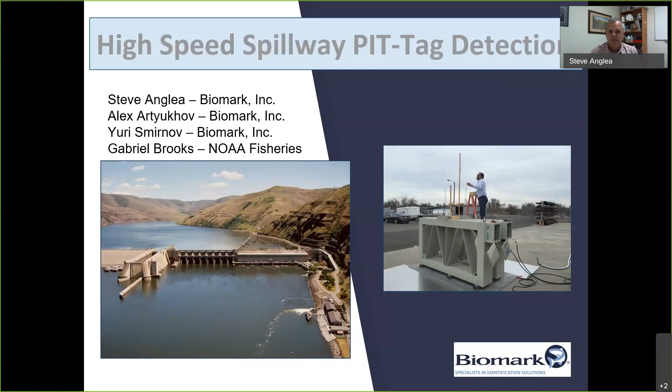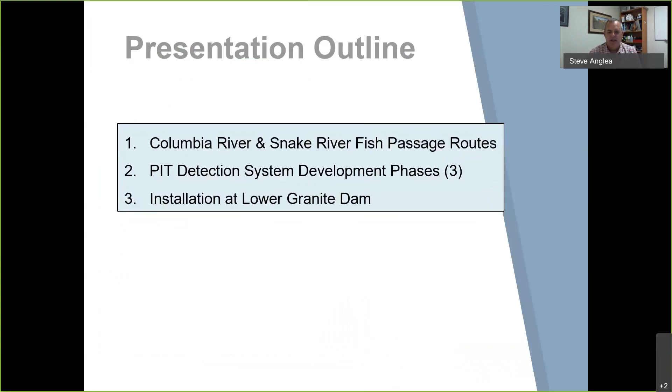I'm going to go over the basic structure of the presentation: a description of the passage routes present at the dams in the Pacific Northwest, the phases of development of this project, and ultimately the installation at Lower Granite Dam.

The study area for the project is in the Pacific Northwest of the United States, predominantly in the Columbia River Basin. The areas of interest are the Lower Snake River, which consists of 4 hydroelectric projects, and the Lower Columbia River. The dams of particular interest are Lower Granite Dam, the first hydroelectric facility encountered by juvenile salmonids migrating downstream, and Bonneville Dam, the last project encountered by juvenile salmonids.

All of these locations have adult and juvenile passage structures, and all of those structures have pit tag detection in them. Detections at the locations are transmitted automatically to a regional database called the Pit Tag Information System, or PTAGIS. It's a very extensively wired array within the main stem, as well as many tributaries in the basin.

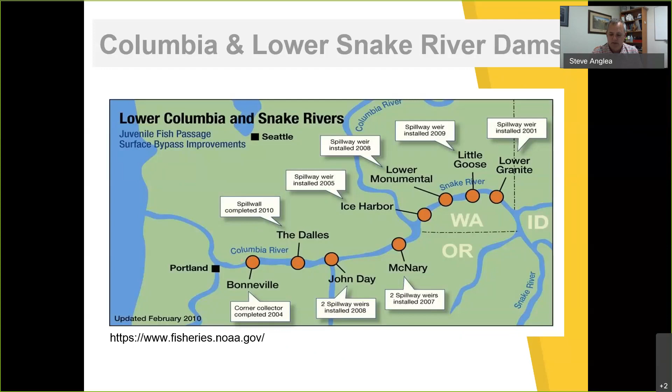To give you a sense of the scale of the dams we're talking about, this is a picture of Lower Granite Dam with a spillway in the middle of the river, and a powerhouse on the right-hand side at this particular location.

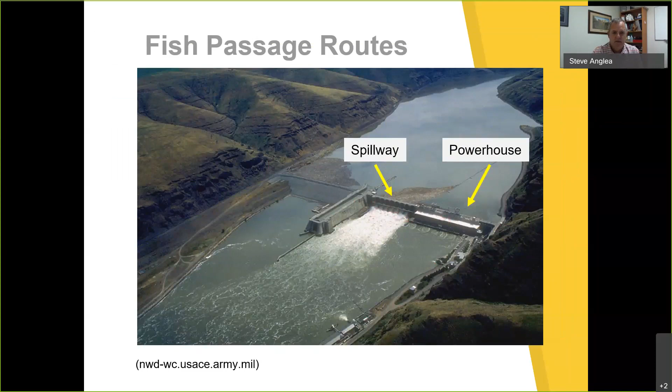The juvenile bypass systems within the powerhouse typically consist of a guidance system that guides juvenile fish, using intake screens, into a bypass system that then routes them to a collection facility downstream of the dam. The other option for passing through the powerhouse is to go through turbines, or obviously spill, where the animals just pass through spill. There are pit tag detectors in the juvenile bypass system, but there are currently no detection systems within the turbine passage route or the spillway.

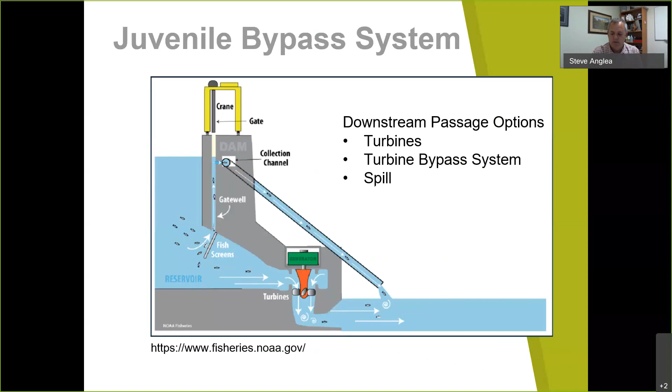One of the impetuses for this project is that as the operation and management of the hydro system has changed to emphasize spill, there are fewer fish passing through the juvenile bypass system and therefore fewer pit tagged fish. NOAA Fisheries, who is responsible for determining the smolt to adult return rates of those fish, is running out of data, or not getting enough pit tag detections to provide reliable estimates for the SAR rates. That led the region to push for the development of a pit tag detection system for the spillway.

The system consists of not only an antenna, but the transceiver and the tag, the three factors that go into a detection system.

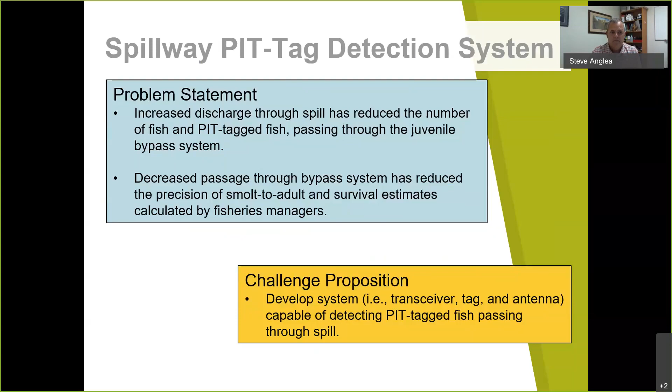The criteria for that system was tag speed, like any system we design. The estimated tag speed for this area would be 60 feet per second, or 18 meters per second, or 41 miles per hour. To get an idea of what that means, imagine that distance of 60 feet or 18 meters, and then transiting that distance in 1 second. So it's extremely fast, much faster than any typical RFID system.

The detection system needed a range of 60 inches, and it also needed to be wide enough to provide 2 or 3 telegrams of the pit tag as it passed through. So those were the criteria.

Just some references: a standard tag traveling 60 feet per second needs 2 feet of activation in order to get a single telegram. This also led to the desire to develop what's called a half telegram, which requires half the amount of time to transmit its signal compared to a standard telegram. A standard telegram requires 32 milliseconds to transmit its tag signal, and a half telegram requires 16 milliseconds.

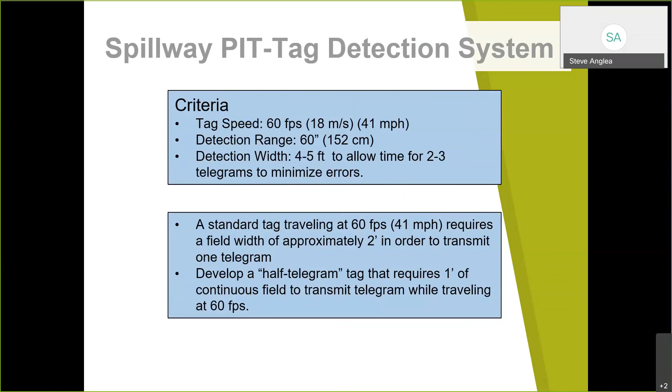Hey, Steve. You mentioned the half telegram tag, and somebody just submitted a question regarding that. Is that something being used on this project?

The half telegram tag is currently not being used. It's a proprietary tag manufactured by Biomark that requires proprietary firmware for the readers. The Corps wanted to, and I can get into the results later on, note that the half telegram tag functions very well, but the Corps wanted to make sure the system performed well for the vast majority of tags already at large in the system. So this system and all the data I'm going to show you is really based on the standard Biomark tag.

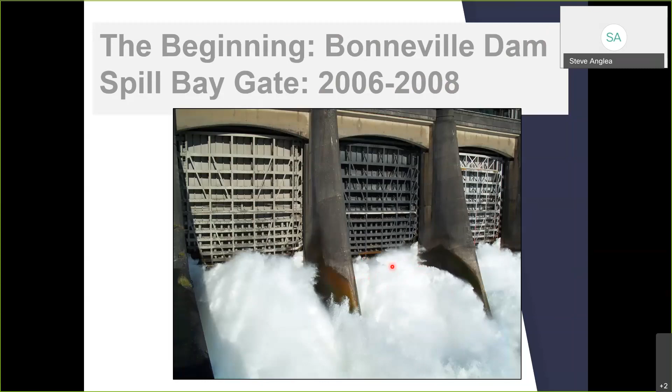Bonneville Dam was built in the 1930s, and the gate repair pit is used to repair gates. They were also concerned with dust from lead paint that had been used over the years, so there was a fair amount of cleaning needed to make that environment suitable to work in.

So here's the gate repair pit. That's the test subject, and this is the leading edge, or the bottom of the gate repair pit. The challenging aspects were the curvature of that gate. It's not just a flat wall or a sill that you could easily mount an antenna to.

So it's kind of two different radiuses that they had to deal with. And it's also metal. The metal absorbs the energy of the antenna's electromagnetic field and reduces its effectiveness. So they had to come up with a means to isolate the antenna when it's placed on metal, but still place it in close proximity to the metal.

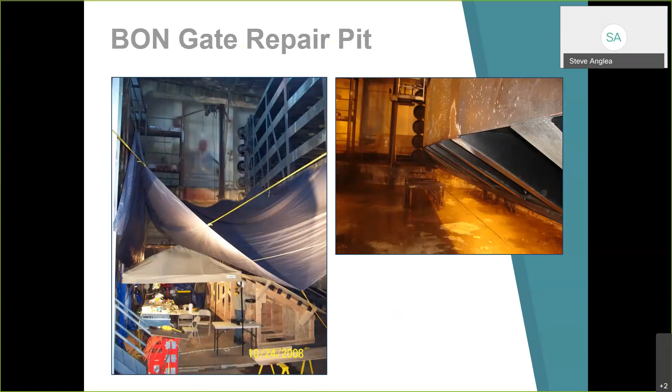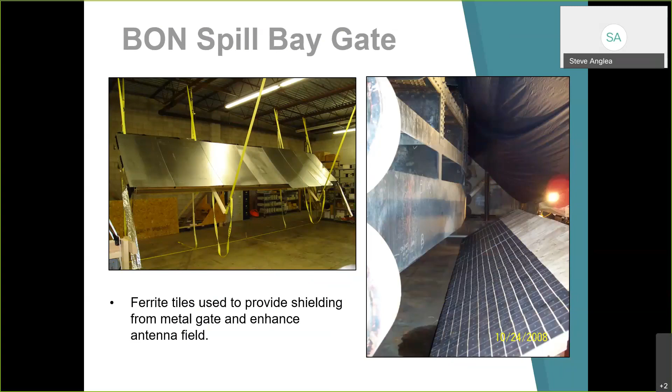And they also used Litz wire as opposed to a traditional copper wire to form the coil. If you haven't seen Litz wire, it almost looks like a multi-strand fiber optic cable. A wire that's rated as 10 gauge has almost 1,000 strands, and each of those strands is insulated. That insulation helps reduce what's called the skin effect and reduces the interaction among the neighboring conductors, providing a low resistance cable that can push a lot of current relative to a standard wire.

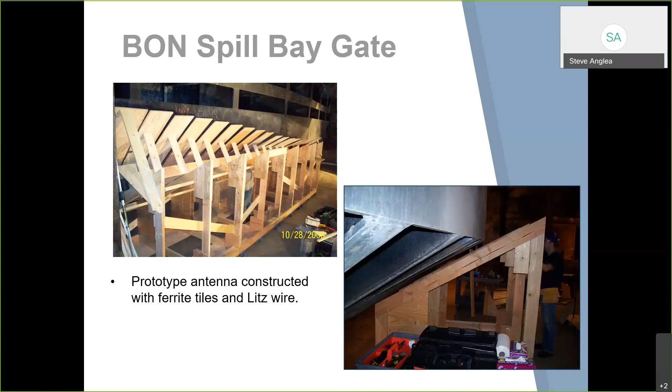So the effort was successful. However, they did run into some practical and logistical issues. The first one is that if you put an antenna on the bottom of the gate, you just have a single detection point. You don't have the ability to empirically determine detection efficiency.

The other challenge is just mounting something to the bottom of the gate with the vibration that occurred—they had some sensors ripped off the gate. And then with the two large 25-foot antennas and expecting thousands of fish passing through, there was a concern that tag collision would be a big issue. If you have two tags in close proximity to each other, they would cancel out, and you won't detect either one. So those were kind of the downsides or issues, but they did learn quite a bit from the effort.

They demonstrated the use of ferrite tiles to get close to the metal gate, so that was effective. Yuri updated the exciter circuit, the tag detection circuitry, to be able to detect a very small tag signal out of the background noise. The transceiver was upgraded to operate on 50 volts DC and push 30 amps of current to the antenna, significantly higher than anything that had been done before. And also, as the last bullet says, they began the conversation of this half telegram, half fast tag.

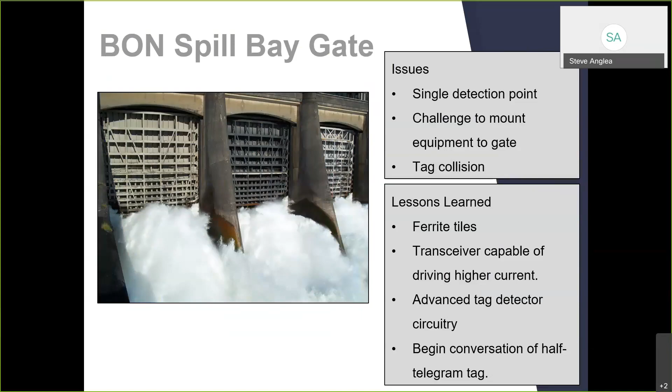So the effort completed at Bonneville Dam. The project wasn't over, but they realized we needed to go to a different location, and that effort shifted to Lower Granite Dam. This is the first dam on the Snake River encountered by juvenile salmonids migrating down the Snake River, and the goal was to take advantage of a reshaping of the Ogee for Spillway 1 that was planned.

Also, the flow is a lot smoother. This is Lower Granite Dam. These are traditional undershot bays, and the very first bay is where the antennas would be placed—you can see the flow is quite a bit smoother in that bay due to the location of a removable spillway weir in Bay 1. The water velocity in this location could still reach up to 80 feet per second, or 24 meters per second, and anticipated water depth was around 4 feet, or 1.2 meters deep.

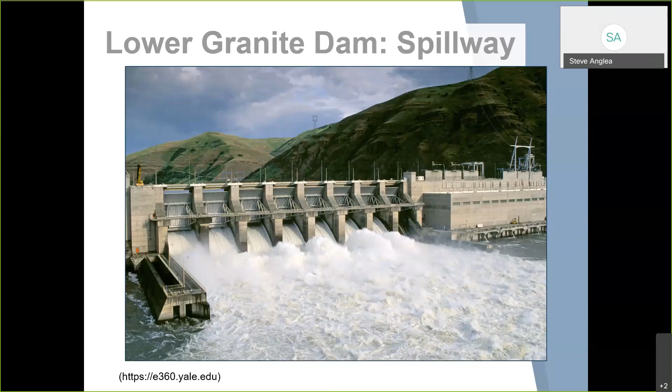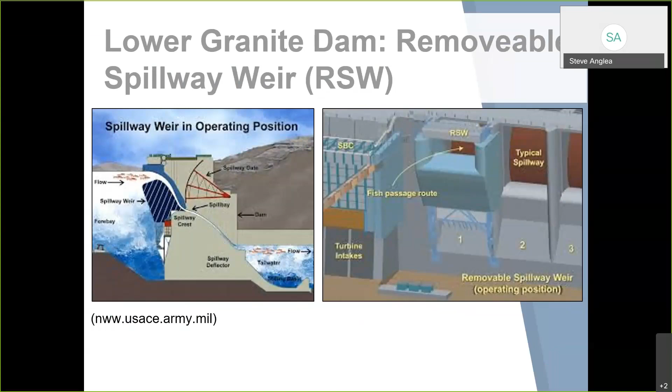From my previous life when I worked for the National Lab, monitoring this thing when it was developed, it creates what's called a flow net, or river, in the upper 20 feet or so of the forebay. Fish sense this flow net and use the RSW passage at a higher rate than the amount of flow going through that location. That was one of the advancements, and these RSWs have since been deployed at other facilities in the Lower Snake River. Just to give you an idea of what this looks like.

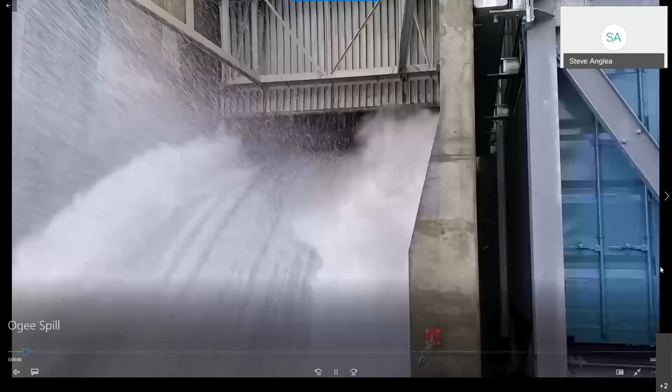This is the flow underneath the gate, at Spillway 1 at Lower Granite. The idea was to place antennas on the Ogee to detect fish passing through that jet of water.

Here's a section view of the Ogee. The idea was to place antennas on the Ogee, taking advantage of relatively low flow. The antennas would be in trenches cut across the width of the Ogee. The Ogee spill bay is 50 feet wide, and the trenches cut would also be 50 feet wide, not surprisingly. But they'd also need to be 7 feet deep and 6 feet wide in order to cut the ferrous rebar back far enough so it didn't impact antenna performance, once the antennas are placed in there. So a pretty big excavation, or mining, of the Ogee surface.

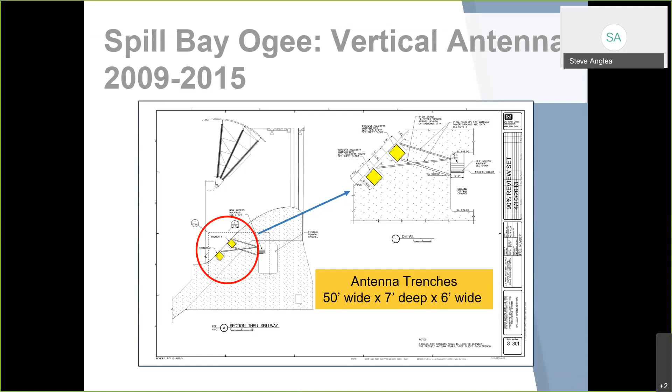The initial antenna design that Yuri came up with was a V-shaped antenna, consisting of 2 independent coils. Here's a coil, and here's a coil, again constructed using Litz wire. The idea was that the electromagnetic field generated by each coil would push up together, like 2 balloons or 2 beach balls pushing against each other, and that interaction would enhance the height of the antenna field. The results were very successful.

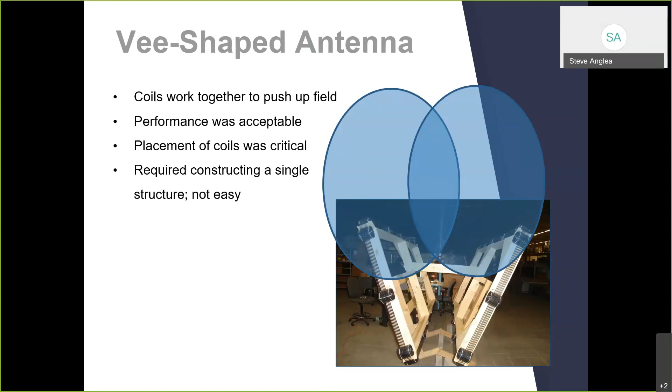However, from a practical standpoint it became unrealistic, because the angle the individual coils were mounted at had to be very precise, making it tough to manufacture, ship, and install while maintaining that angle. One way around it was to create an antenna that encased both coils in the entire volume, but that meant a huge monolith that would be tough to construct and install, with a huge air void inside that could expand and contract. So even though detection was effective, it wasn't really a buildable antenna.

That led to the use of what we call upright coils. With vertical antennas, we could use two or three sub-antennas. Each sub antenna structure is 4 feet tall, about 8.5 feet long, and 15 inches wide. The spacing between sub antennas could be adjusted to change the height of the field and the detection range, or we could also go down to two sub antennas, where one antenna is actually driving and the other is kind of pushing the field into the other coils.

The other requirement was the read range. Regardless of the antenna shape, we still needed to maintain a 50-inch read range above the antenna in a pass-by orientation.

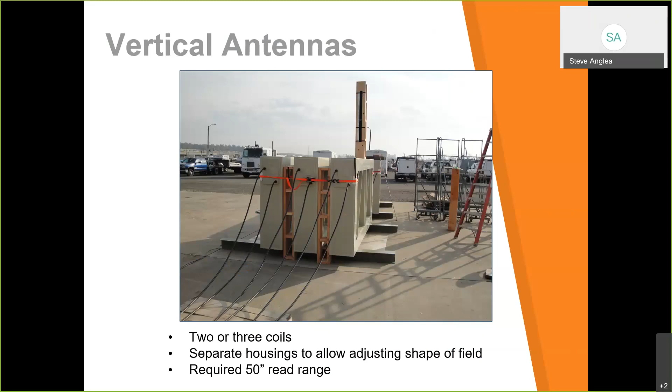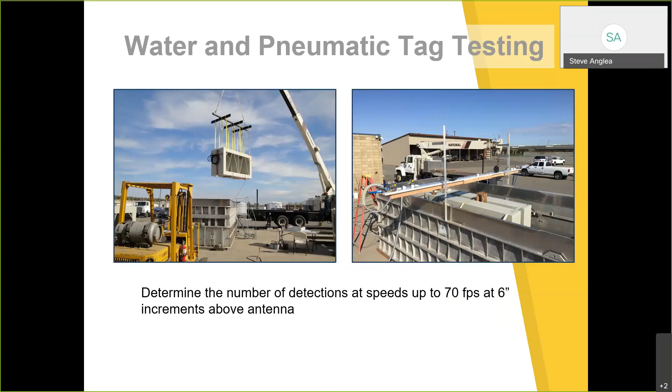Here are some pictures of testing conducted at the NOAA Fisheries facility in Pasco. Here we have two sub-antennas being lowered into an aluminum tank. To verify performance at speed, the Pacific States Marine Fisheries Commission built a pneumatic tag shuttle that let us put a tag in a wooden dowel and shoot it across the antenna at a variety of speeds and heights, starting at the top of the antenna and moving up until it was no longer detected, figuring out where the limit was to get an adequate number of detections.

From the testing in Pasco, we mapped the field using a static tag. Here's Uri — we have a test tag on a stick, and we create this shell, shown in a graph Gabriel put together. We could use a static tag to determine the outer limits of detectability, and we would also shoot a shuttle or tube to determine how it performed at speed.

With this antenna configuration, we were able to read a tag above 54 inches in a static position, shown by this orange area. But that area wasn't sufficiently large or long enough to detect the tag at speed.

You had to be able to detect a tag traveling at speed, 60 feet per second, so you need a length of travel that's more along the 30 inches above the antenna, more down in here. I guess you have to assume there's a detection volume—the area under the shell is the detection volume. So if there's a tag anywhere under the shell, it would be detected, but it needed to be in there long enough to get the 2 or 3 telegrams, and that field was only wide enough 30 inches above the antenna.

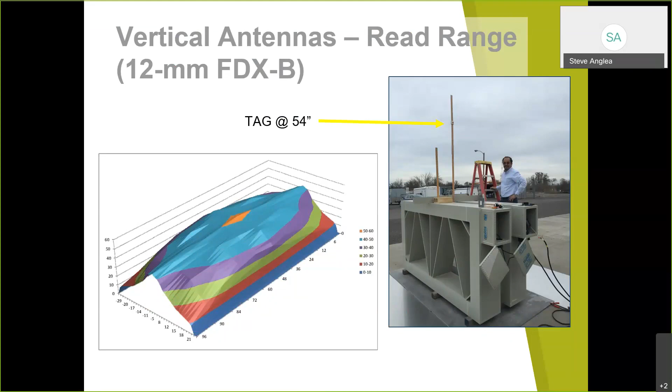Again, some more lessons learned. The standard tag, we could detect at 24 inches above the antenna when it traveled at 60 feet per second. The half telegram tag was effective at a greater distance, but there was also an upper limit to what we achieved with the half telegram tag. It wasn't detected at the 47-inch mark. So the results were good.

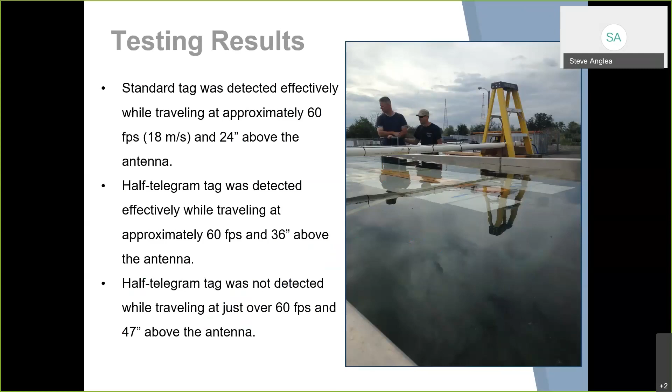Once again, it came down to the structural aspect, similar to the testing at Bonneville Dam and the Vee-Shaped Antenna. You can design a prototype and build a prototype that's effective, but you ultimately need to figure out a way to put it at the dam. When it got to crunch time in discussions with the Corps, it was determined that this 50-foot wide, 7-foot deep trench just was not going to fly. From a structural aspect, the Corps was not interested in cutting a big old notch in their Ogee, which led to the shift to what we call a flat plate antenna that would be no more than 12 inches thick.

So instead of having antennas that go deep into the Ogee, you would have a series of flat antennas, 1 foot tall, placed in 3 different trenches along the Ogee, and as PIT tag fish passed down, they would detect the fish. The speeds expected in this scenario were again in that 50 to 60 feet per second range, and it seemed to go up every time we had a discussion with the Corps.

The balance between the speed and the depth of water is that the water is deeper near the top of the Ogee, and the water is slower, and then as you go down the Ogee, the water depth is lower, but the speed increases. Trying to find the sweet spot in that.

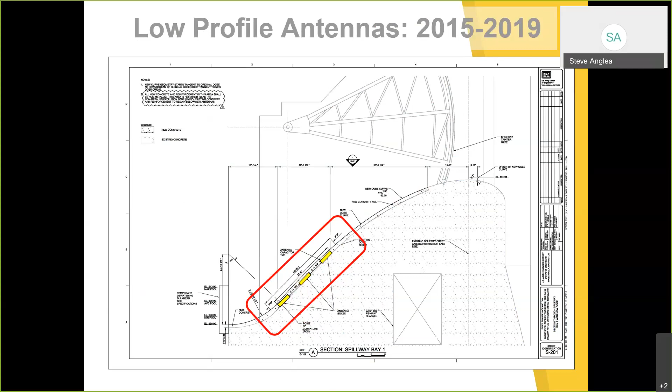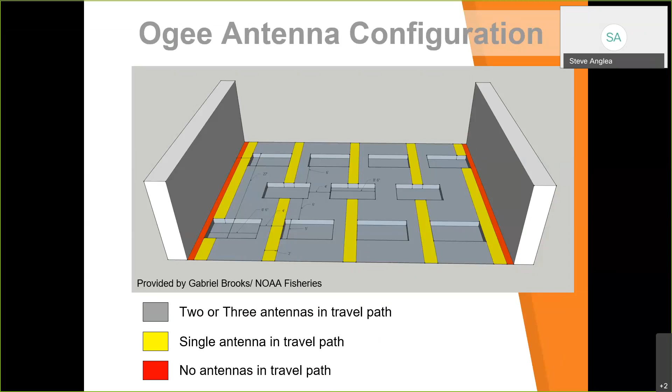And through significant testing, months of testing, this is the end result.

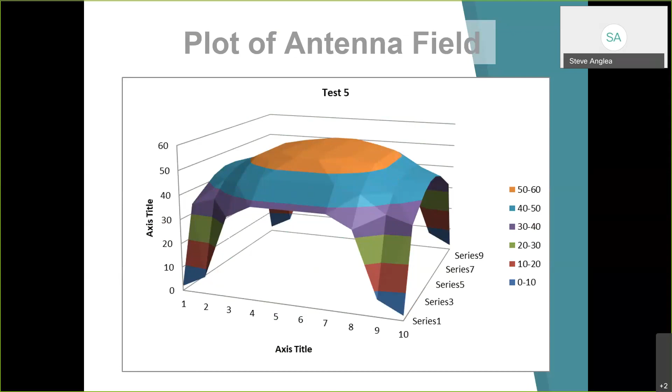So at this point we had an antenna design and were starting to build antennas, but then the project was delayed for a year because of some other construction activities at the dam.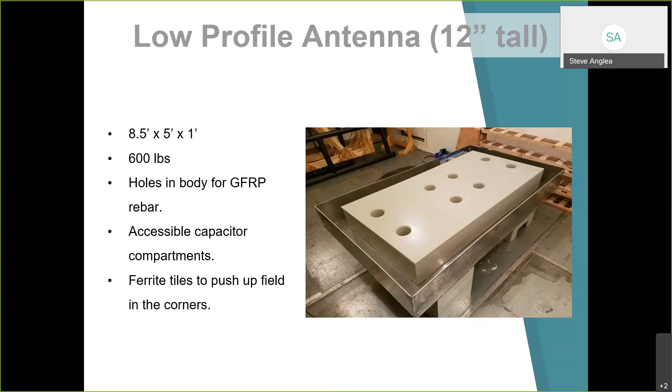We utilized that year to conduct additional testing: testing antenna performance at different cable lengths, testing the antenna with different concrete mixtures, and looking at the synchronization of the antennas together. This is obviously a very large scale project, and we wanted to test everything as much as possible to resemble the final installation, because we were going to get one shot, and we didn't want to install something and find out it didn't work for lack of testing. Here are some photos of the testing.

We did connected synchronization testing at NOAA Fisheries, synchronizing the phase of all the transceivers' exciter frequencies, since they were going to be on and scanning continuously. Here's Alex with some of the Biomark FS3001 transceivers. I think we tested synchronization with 7 antennas—we felt that gave us enough antennas to create a problem if one did exist.

Some of these are prototype antennas. They were positioned in the yard at the NOAA facility in the same relative position they would be placed when on the Ogee. The results were good, so the synchronization algorithm that was developed was effective.

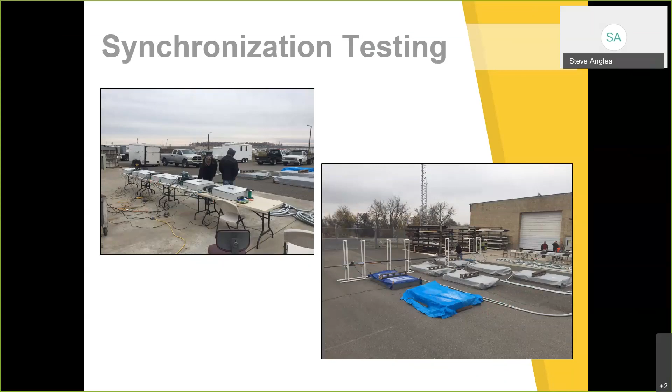Another test we conducted was to place the antenna in water and then put concrete blocks matching the same composition as the concrete that would be used at the actual install on top of the antennas. There was a big discussion about how little magnetic sand or magnetic cement goes into the composition, so there was great concern and uncertainty, and to get rid of that uncertainty, we tested it.

So initially we tested with blocks—here's a painted aluminum shield, you can see the antenna underneath, and then the concrete blocks. We did see some issues there, and thought they may have been related. This thing creates 30 amps—if you get too close to the shield you may get shocked. It's creating a tremendous amount of power, and we were thinking the gaps between the blocks might be the reason for some of the static we saw.

So the next test was to entomb the antenna in the same concrete composition, but completely entomb it in a monolith, flood it. We used the same stainless steel conduit that was going to be used, so this represented, as far as we could get, the configuration that would be used at the installation.

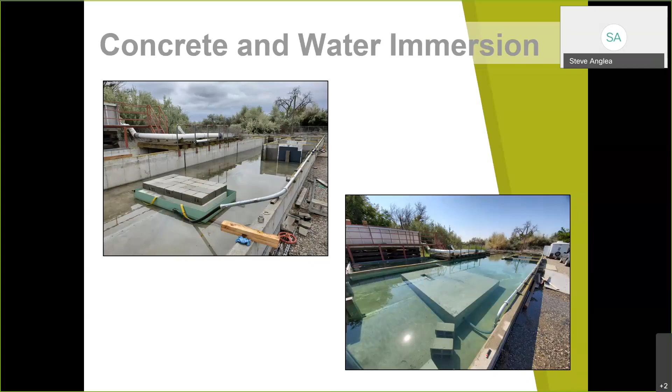Once all the antennas, transceivers, and power supplies were tested in Boise at Biomark's facility, they were tested at the Pasco facility in Washington, then transported about 2 hours to Lower Granite Dam, where everything was tested again to make sure nothing broke during transport, and that the final location was acceptable with respect to electromagnetic interference, which it was.

And then finally, the antennas were installed on the Ogee. So here you can see the 3 rows, the 11 antennas.

Each antenna had two stainless steel conduits that ran from the antenna up to the transceiver room, which I'll show in a couple of slides, to connect to the transceiver. All of the rebar that was replaced or used within the new construction was fiberglass rebar, not ferrous rebar.

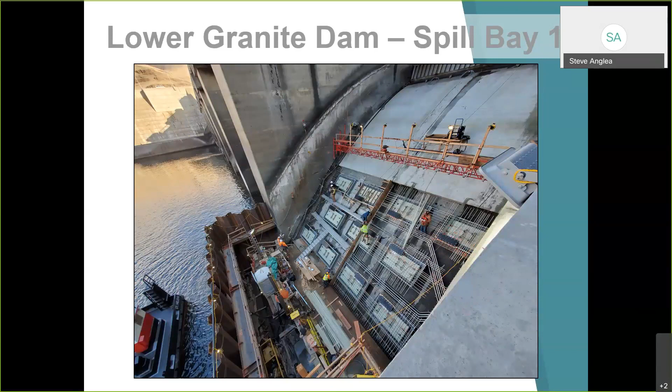All the antennas had a hatch constructed on the antenna, but we also needed a means to get through the concrete pour. So hatches were built that sat right above the hatch on the antenna, to allow us to access the capacitors through the hatch once the concrete was poured.

Here's a picture of the hatches. These are all fiberglass frames with fiberglass rods to key into the concrete, and then the UHMW hatch that could be removed to access the capacitors.

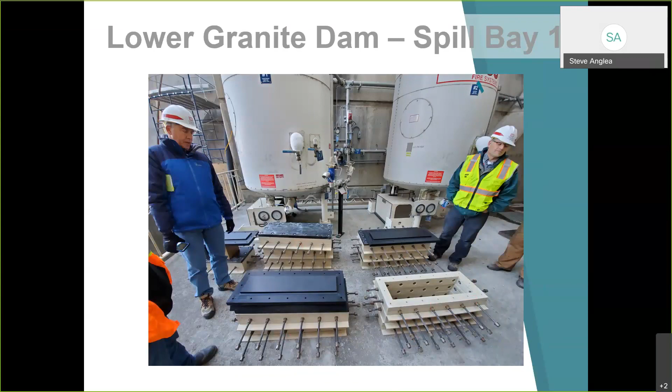Here's a picture of the electronics trailer. Each of the antennas has a dedicated transceiver. All the transceivers are located in the lower enclosure. We have stainless steel conduit that runs up to the bottom of the enclosure. Here's a picture of the inside of that trailer with all the enclosures and the stainless conduit running up to each enclosure. Gabriel giving a tour.

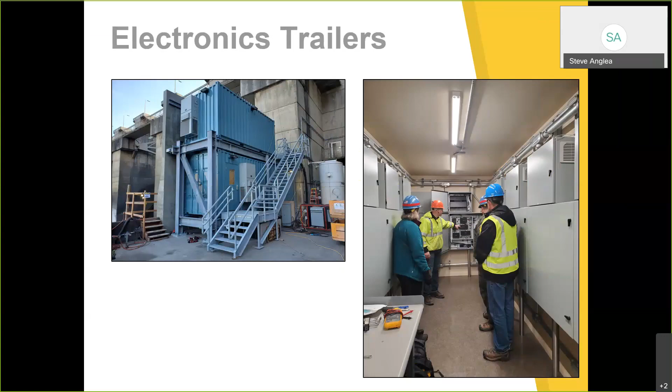The upper connex trailer, or the penthouse, holds a couple of computers that are used to collect data locally and access points for remote communication.

Here's a close-up of one of the electronic enclosures. A power supply that Alex Archikoff assembled allows providing 50 volts DC to the transceiver.

Here are the guts of the transceiver. I guess one of the unique things about the transceiver is each of the processes, the detector, the exciter, the CPU, are contained in separate modules, and each of those is shielded independently from each other to reduce the amount of interaction, to the highest level possible.

Additionally, each of the enclosures contained a fixed value capacitor here, and then also a vacuum variable capacitor on the transceiver side. So we had tuning capacitors on the antenna, and then a tuning capacitor in the enclosure that allowed us to make some fine scale adjustments to the tuning circuitry.

It cost about $30,000 to mobilize the construction crew to provide us access to the Ogee surface. So if we were able to make changes without doing that, it was a huge time and cost savings.

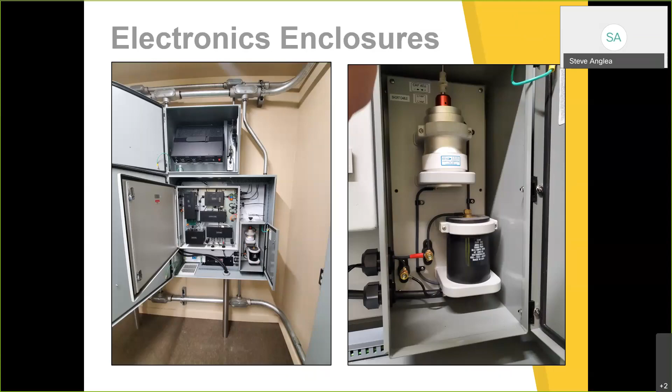So the antennas are in, and now it's time to pour concrete. You can see all of the white sticks, that's the fiberglass rebar.

Here's the construction crew. By this point, we've finished the pouring on the south side, and the crew there, there's a pumper truck behind me when I took the photo. Here's the hose from the pumper truck providing concrete.

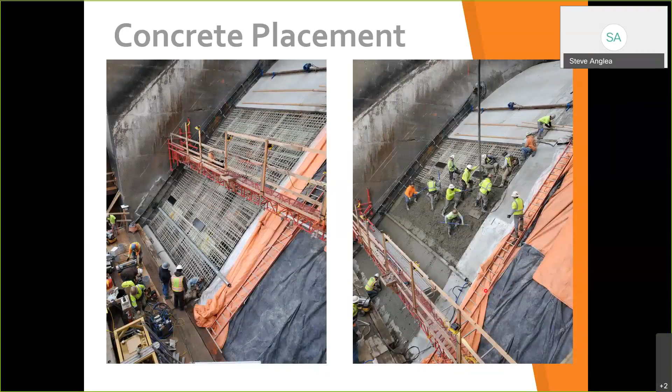These guys are doing concrete work. You have 3 or 4 guys in there with vibrators or stingers, making sure the concrete flows down into all the interstitial spaces. And there's a roller to help smooth that surface.

Here, let's go back to that. This is a video of that process. You can see the scree roller.

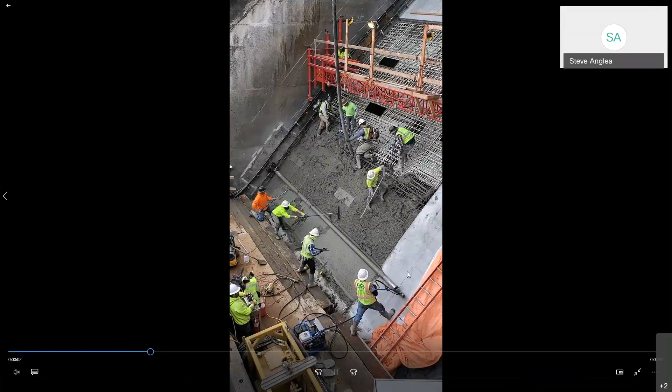Here you can see the top of the hatch that was later accessed. So let's go here.

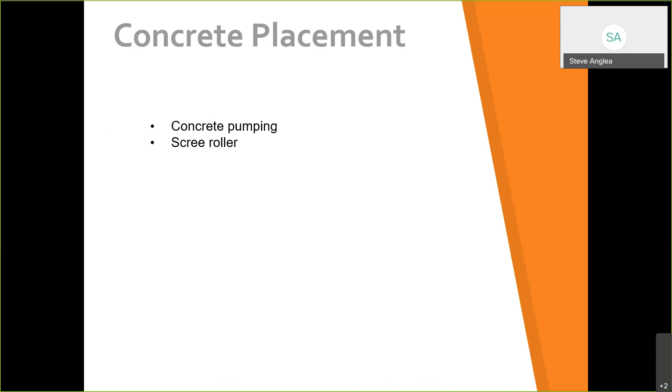So here's the final product. This is right as the north side was just getting done, at the south side and the north side.

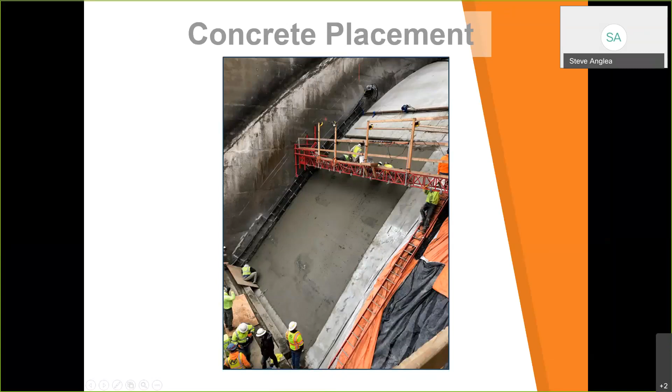And then finally the concrete cured for a couple weeks. Then Gabriel went back, and Gabriel and the guys from Pacific States went back to conduct the measurements. So here's Gabriel. Now that the antennas are covered up, you can't really see them.

I'm not entirely sure, but I think the construction crew put lines across the middle of each row of antennas that would provide a reference for the guys taking measurements. Here's Gabriel tethered off, and then Scott Livingston from the Pacific States Marine Fisheries Commission, and used an FDX-B tag, our APT12 FDX-B tag, to measure read range at 12-inch intervals across the Ogee surface.

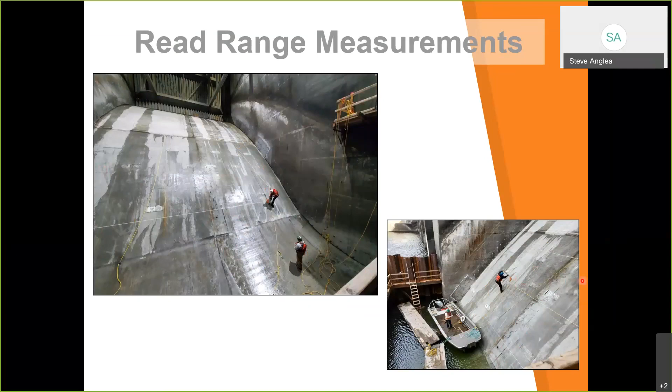So it's a pretty exciting location. I think it's a 1-to-1 slope that they were working on. And this all ultimately confirmed the read range that we saw during the development phase.

And you can see that within this area or volume, the vast majority of paths indicate two or three antennas or detection opportunities. So it's really encouraging.

They did some test measurements with tags embedded in sticks, and due to the water velocity, initially the sticks were being launched out of the spray until they weighted the sticks down with rocks, which helped them at least stay submerged. There was a live fish test planned for April, but it was canceled due to the COVID pandemic.

And then finally, question for you. Yeah, I think you touched on it briefly, but another tag question. You had mentioned most of the testing was done with the standard FDX-B tag. Can you explain that a little further? Yeah, so that...

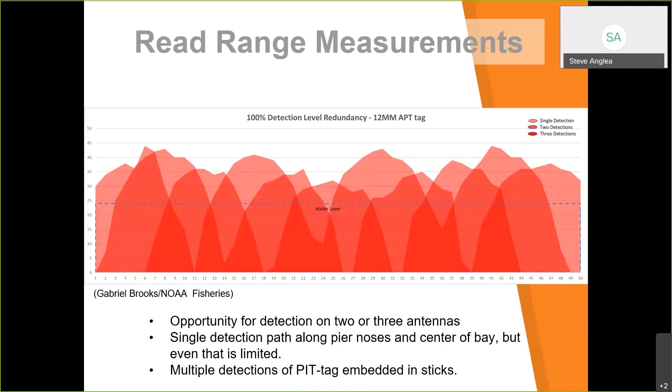Okay, great, thank you. Here's a final picture taken by Joe Norton from the Corps of Engineers. You can see the hatches, nice smooth concrete surface, and the access hatches to each of the antennas, used to access the capacitor compartments of each of the antennas.

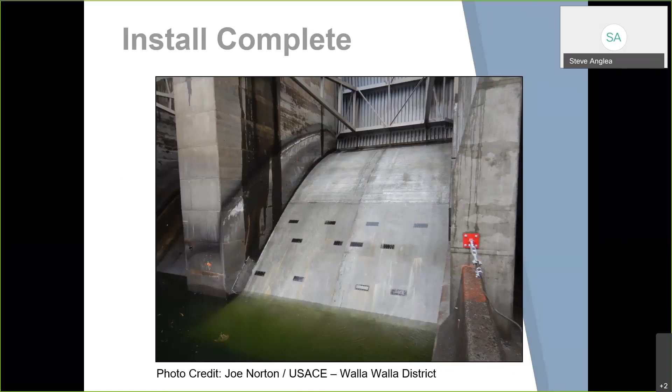The final shot of the Ogee once it was open. So again, a very dynamic environment—fast water, huge project. The Corps of Engineers was great to work with, their contractor was great to work with, and BPA as well. So it was a huge collaborative effort.

Ultimately, the reason for the spillway detection system was to supplement detections at the dam that were being lost due to water going through spill, or fish going through spill. As of yesterday, there were almost 157,000 unique tags detected on the Ogee system here, from the middle of April until June 22nd, compared to 34,549 tags detected through the bypass system.

Prior to the Ogee system, without the Spillway Ogee system, they would have relied on this 34,000 tags to help guide the SAR. But now they have the additional 157,000 tags detected just on this location, just on the antennas of the Ogee system we installed. So it was a huge success from that aspect.

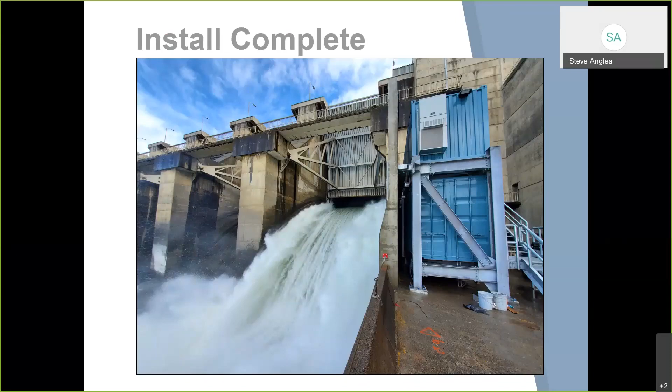Thanks, Steve. Nice job. Pretty cool project.

We did have a couple more questions for you. One person asked: are there any plans to replicate this or add other facilities in the Columbia or elsewhere? What's the sense there?

Yeah, there's a working group right now looking at options for enhancing PIT tag detection at Bonneville Dam. Currently there's an antenna in what's called the corner collector at Bonneville Dam, a 16-foot by 16-foot antenna, so it's very large. A lot of the transceiver used on the Ogee project is related to the transceiver down there. Looking at the cost benefit, Bonneville Dam's the last dam, so do we add another corner collector antenna? Do we add an antenna to the ice and trash sluiceway? Do we add one to the spillway? Given budget cycles and everything else going on, that's the current conversation being had. There are other RSWs in the Lower Snake River, but I think the effort at Bonneville Dam would be the next thing to happen, and that could be 3 or 4 years from now, but that's the one on the table right now.